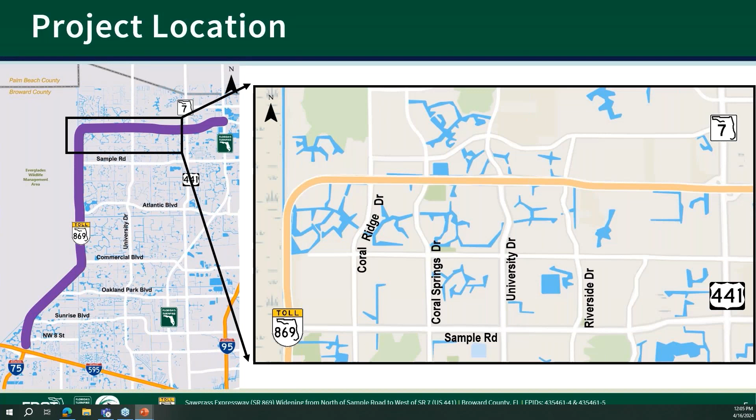The Sawgrass Expressway, shown in purple, is located in Broward County, Florida, and connects I-75 with Florida's Turnpike. The enterprise is improving mobility on Sawgrass Expressway through a series of widening projects. The projects covered in today's meeting are from north of Sample Road to University Drive and University Drive to west of State Road 7.

Florida's Turnpike Enterprise follows a 5-phase project development process for delivering needed infrastructure improvements to communities throughout the state. The phases include planning, project development and environment study, design, right-of-way acquisition, and construction. The planning and project development and environment phases of this project have been completed, and the project is currently in the design phase. The design phase is when the construction plans and proposed costs to build a project are developed.

The right-of-way phase only required acquisition of one parcel and has already been completed. The construction phase for University Drive to west of State Road 7 is anticipated to start in the first quarter of 2026, and the construction phase for north of Sample Road to University Drive is anticipated to start in the third quarter of 2026.

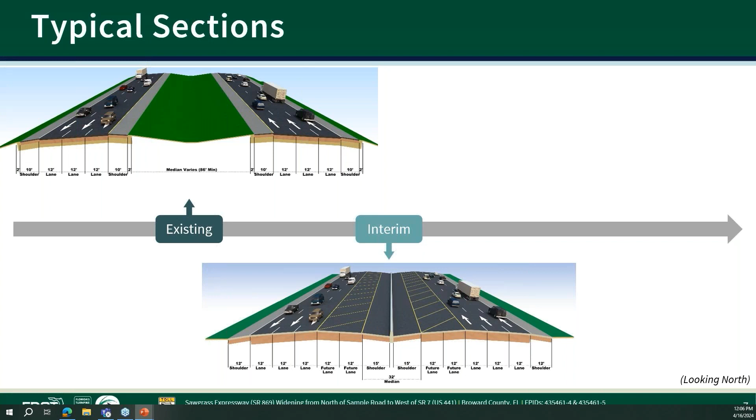Currently, the Sawgrass Expressway is 6 lanes. This project is part of a series of projects to widen Sawgrass Expressway to 10 lanes from north of Sample Road to west of State Road 7. To ensure lane continuity, only 6 lanes will be open to traffic. Once all segments are constructed, an implementation project will follow and all 10 lanes will be open to traffic. The typical section will consist of 10 12-foot lanes with 12-foot shoulders.

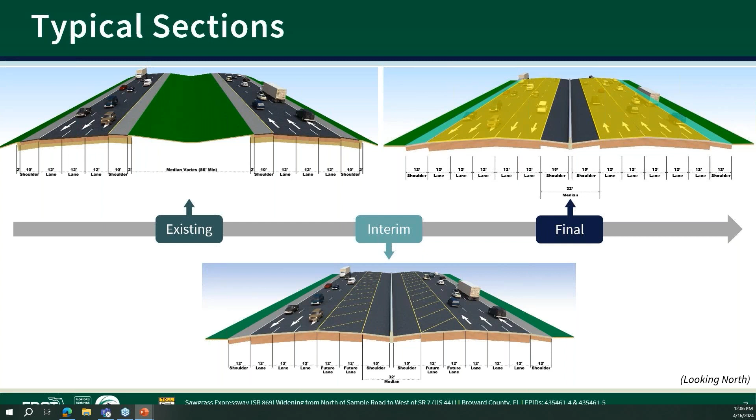We will now walk through the major design features of the project. In the following slides, the map on the left side of the screen will act as a guide as we walk through the project improvements. Please note that the map has been rotated so north is to the right.

The project begins north of Sample Road. The proposed water treatment swales are shown in light blue. Swales are shallow channels designed to store and convey stormwater runoff as well as remove pollutants. All proposed water treatment swales will be maintained within the existing right-of-way.

Additionally, existing noise walls, shown in blue, can be found on both sides of the corridor within the study. All existing noise walls will remain or be replaced, and new noise walls are also proposed. In select locations, existing noise walls will be removed and replaced in kind during construction to accommodate the widening of the Sawgrass Expressway. All existing and proposed noise walls are shown in subsequent slides.

The widening of Sawgrass Expressway continues to Coral Ridge Drive. All proposed water treatment swales will be maintained within the existing right-of-way, and all existing noise walls will remain.

In a diverging diamond interchange design, traffic crosses to the other side of the roadway between ramps. The crossover points will be signalized to enhance safety and traffic flow.

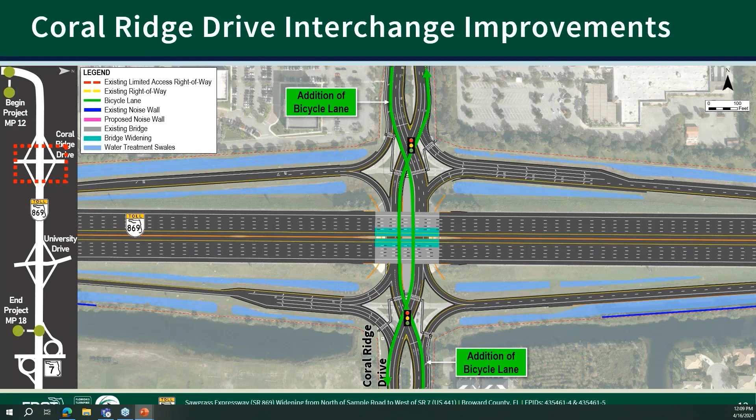Other improvements at the Coral Ridge Drive interchange include the addition of bicycle lanes, shown in green, and a sidewalk through the interchange to address gaps in pedestrian accommodations and to enhance pedestrian safety along Coral Ridge Drive.

Looking northbound, the proposed roadway typical section along Coral Ridge Drive beneath the Sawgrass Expressway accommodates 4 15-foot lanes, 2 in each direction, 2 15-foot auxiliary lanes, 1 in each direction, 8.5-foot bicycle lanes in both directions, and a 13-foot sidewalk in both directions located in the median.

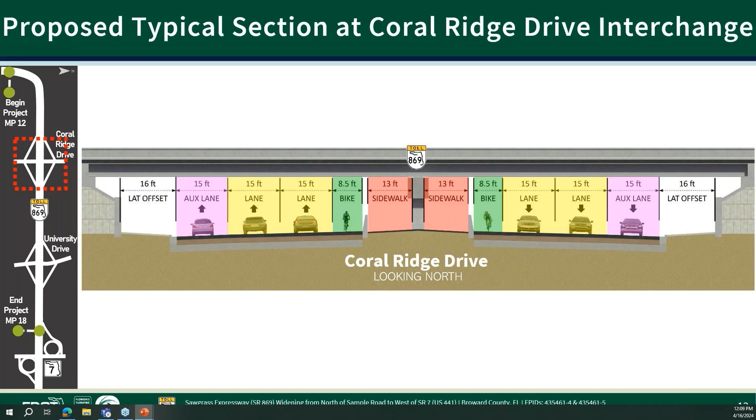As part of the improvements at the Coral Ridge Drive interchange, new turn lanes, shown in orange, will be provided. Additionally, bicycle lanes, shown in green, will be added along Coral Ridge Drive. All improvements will be accommodated within the existing right-of-way.

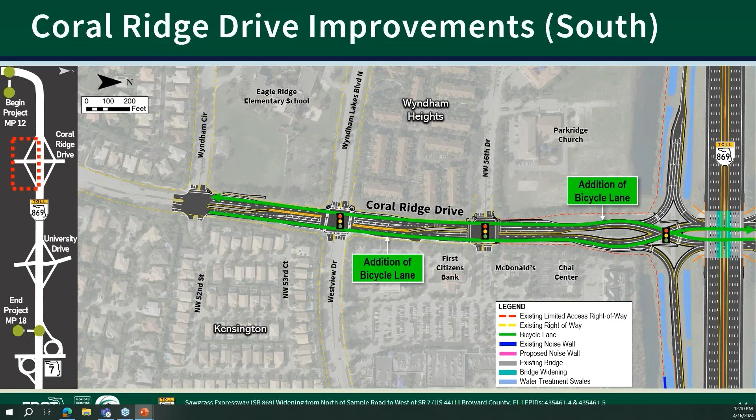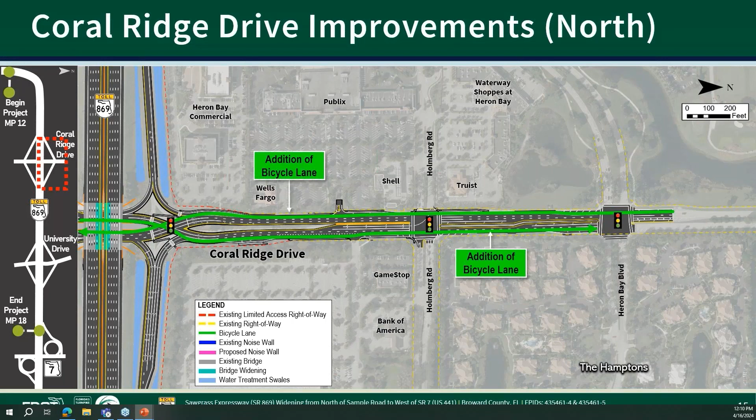North of Sawgrass Expressway, a new turn lane onto Coral Ridge Drive, shown in orange, will be provided at the interchange. Additionally, bicycle lanes, shown in green, will be added along Coral Ridge Drive. All improvements will be accommodated within the existing right-of-way.

Looking northbound, the proposed roadway typical section along Coral Ridge Drive, north and south of the Sawgrass Expressway interchange, accommodates 6 varying 11 to 15-foot lanes, 3 in each direction, one 12-foot auxiliary lane in the southbound direction, a 7-foot bicycle lane in both directions, and a 6-foot sidewalk on both sides of the road.

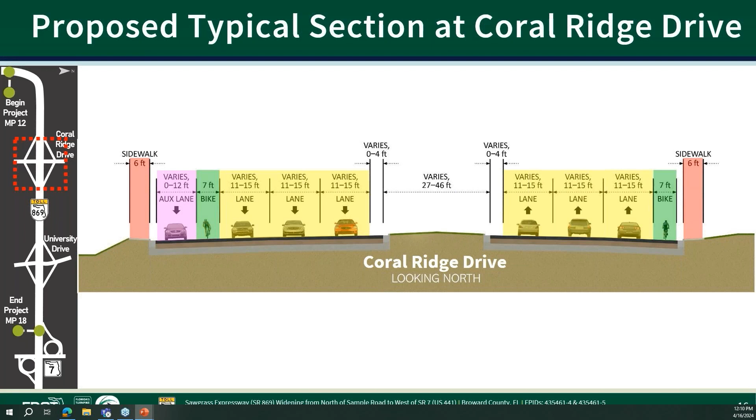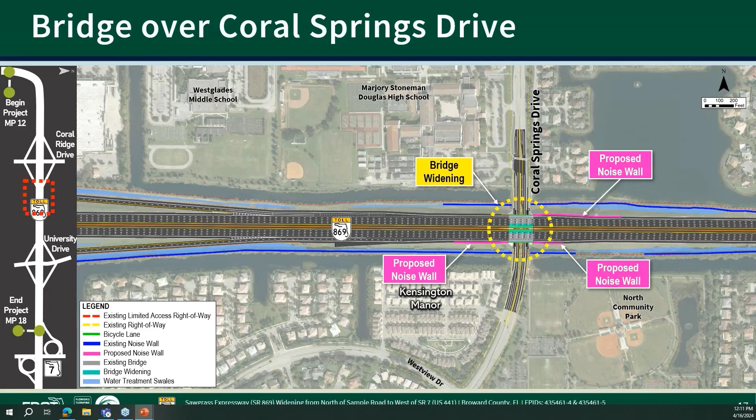For more information regarding the noise wall evaluation process, please view the Florida's Turnpike traffic noise video, available on the project website at www.sawgrasssample2sr7.com. The widening of Sawgrass Expressway continues between Coral Springs Drive and University Drive.

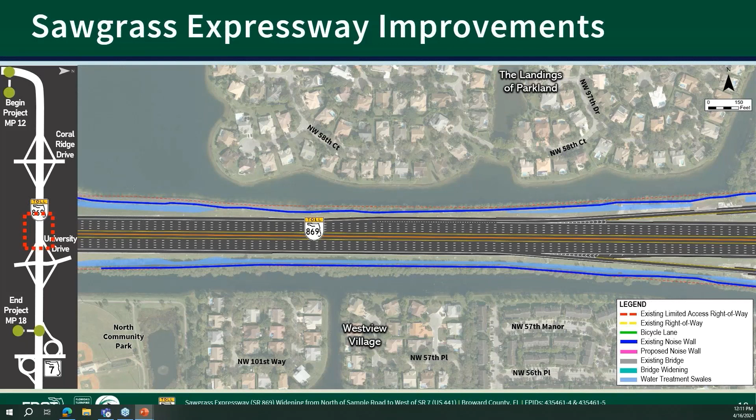All proposed water treatment swales will be maintained within the existing right-of-way, and all existing noise walls will remain. In addition to widening Sawgrass Expressway to 10 lanes, the bridges over University Drive, shown by the yellow circle, will be widened.

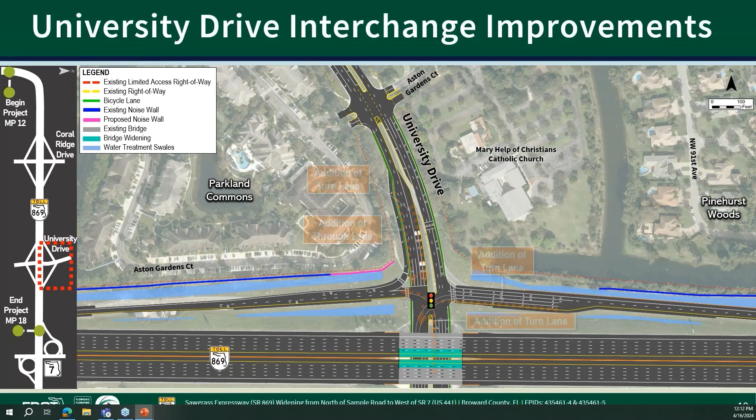A new noise wall is proposed at the Sawgrass Expressway westbound on-ramp, as shown in pink. Other improvements along University Drive and at the interchange include new turn lanes and new through lanes, shown in orange, and bicycle lanes, shown in green. All improvements will be accommodated within the existing right-of-way.

South of the University Drive interchange, new turn lanes and through lanes, shown in orange, will be provided along University Drive and at the interchange. Additionally, bicycle lanes, shown in green, will be added along University Drive.

All improvements on University Drive will be accommodated within the existing right-of-way, and this leg will tie into a widening project being conducted on University Drive, south of Westview Drive.

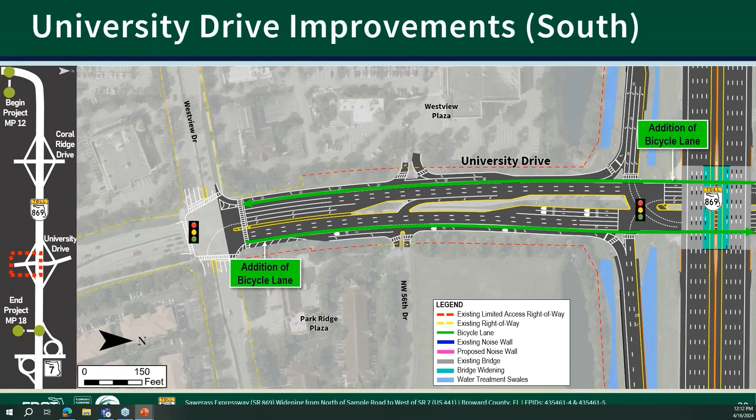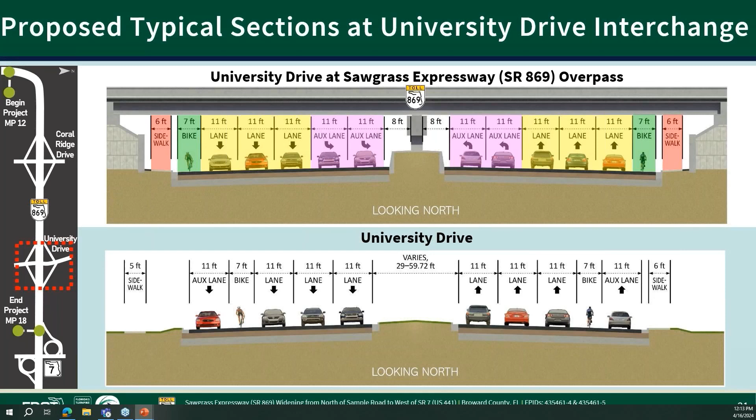The proposed roadway typical section along University Drive north and south of the Sawgrass Expressway interchange accommodates six 11-foot lanes, three in each direction, two 11-foot auxiliary lanes, one in each direction, a 7-foot bicycle lane in both directions, and a 6-foot sidewalk on the northbound side and a 5-foot sidewalk on the southbound side.

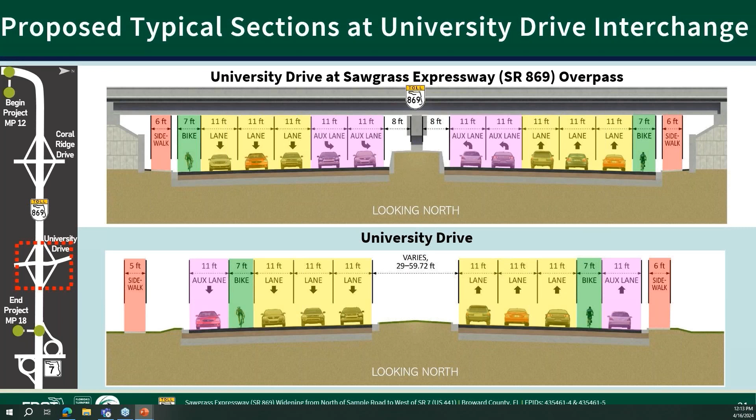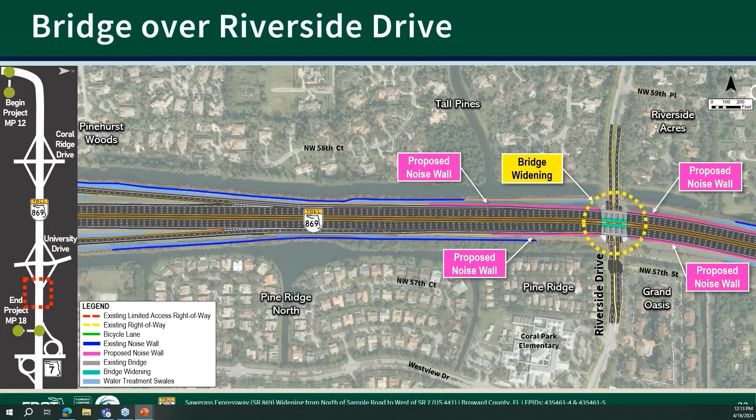The widening of Sawgrass Expressway continues. As shown on this slide, all proposed water treatment swales will be maintained within the existing right-of-way. New noise walls, shown in pink, are proposed to replace the existing noise walls.

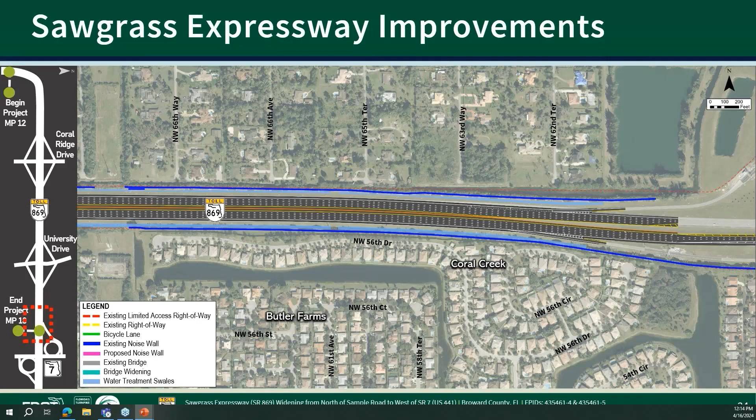The Sawgrass Expressway project ends west of the State Road 7 interchange and will tie into the existing Sawgrass Expressway. As shown in this slide, all proposed water treatment swales will be maintained within the existing right-of-way, and all existing noise walls will remain. When the project reaches the construction phase, signage will be placed to inform drivers of changes in traffic patterns.

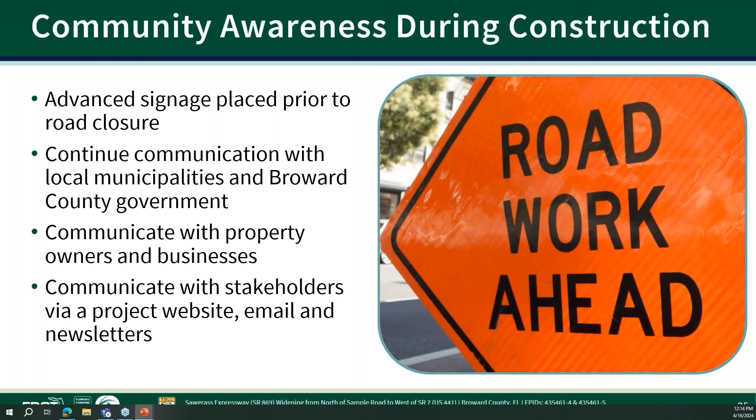The Florida's Turnpike Enterprise will continue coordinating with local agencies, businesses, and the public during project construction through the project website, email, and newsletters. Traffic will be maintained during construction to minimize disruptions to the traveling public.

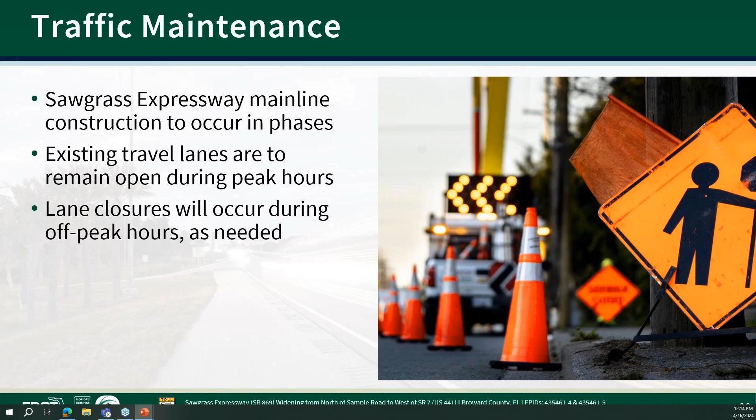Construction along the Sawgrass Expressway will occur in phases. Existing travel lanes will remain open during peak hours, and short-term lane closures will occur during off-peak travel hours as needed.

The design of the Sawgrass Expressway from University Drive to west of State Road 7 is anticipated to be completed by the third quarter of 2025, with construction starting in the first quarter of 2026. The design of the Sawgrass Expressway from north of Sample Road to University Drive is anticipated to be completed by the first quarter of 2026, with construction starting in the third quarter of 2026.

Please visit the project website for all project updates, documents, and announcements at www.sawgrasssample2sr7.com. Your questions and comments are essential to this process and will help Florida's Turnpike Enterprise understand your concerns and suggestions for the proposed improvements being presented today.

There are multiple ways to submit your comments to Florida's Turnpike Enterprise. First, you can contact the project manager, Jason Christopher, at 407-264-3260 or via email at jason.christopher@dot.state.fl.us. Or you can contact the Communications Outreach Coordinator, Carrie French, at 407-264-3908 or via email at carrie.french@dot.state.fl.us. Secondly, you may submit your questions and comments directly through the project website at www.sawgrasssample2sr7.com.

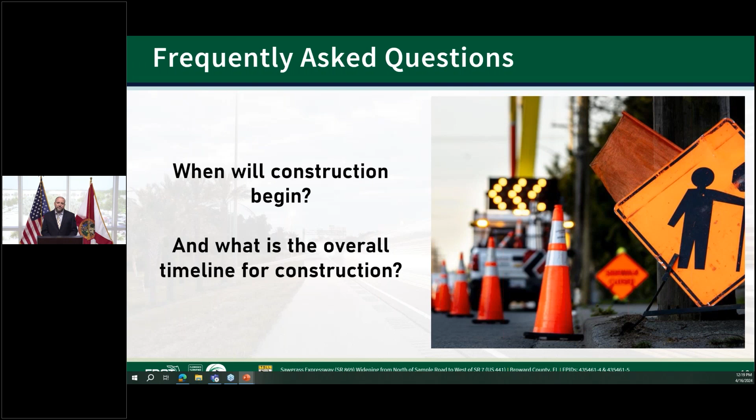Our next question asks, why is Florida's Turnpike Enterprise widening the Sawgrass Expressway?

The Sawgrass Expressway connects the cities of Coral Springs, Sunrise, Tamarac, Parkland, and Coconut Creek. The population of all 5 cities in Broward County is projected to grow between 12 to 21% over the next 16 years. The population of Broward County in 2020 was 1.9 million and is expected to increase to 2.2 million by 2040. This increase in population will result in more traffic on the Sawgrass Expressway, and therefore Florida's Turnpike Enterprise is widening it to accommodate future travel demands.

The Sawgrass Expressway is also part of the Emergency Evacuation Network, designated by the Florida Division of Emergency Management and by Broward County. Increasing the capacity of the Sawgrass Expressway will reduce evacuation times for residents of Broward County during emergencies and hurricane evacuations.

Our next question is, what are the benefits of a diverging diamond interchange, also known as a DDI? This project will convert the existing diamond interchange at Coral Ridge Drive to a diverging diamond interchange.

A diverging diamond interchange provides significant safety and traffic benefits compared to a traditional interchange, such as improving safety by utilizing a curved roadway design, which results in slower design speeds, improving safety by reducing the number of times vehicles have to cross one another, increasing the capacity for left-turning traffic movements, reducing the potential for wrong-way traffic movements onto ramps, and improving sight distance for traffic making turning movements within the interchange.

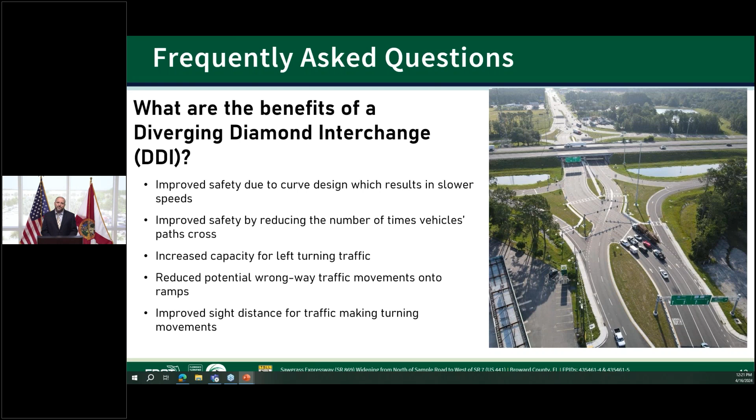We have another two-part question. The first part is, will this project impact existing noise walls? And the second part is, will new noise walls be provided?

A noise study evaluation consistent with federal and state regulations was performed for this project. All the existing noise walls will remain or be replaced, and new noise walls are also proposed. In select locations, existing noise walls will be removed and replaced in kind during construction to accommodate the widening of the Sawgrass Expressway. For more information regarding the noise wall evaluation process, please visit the project website to access the link to the Florida Turnpike traffic noise video.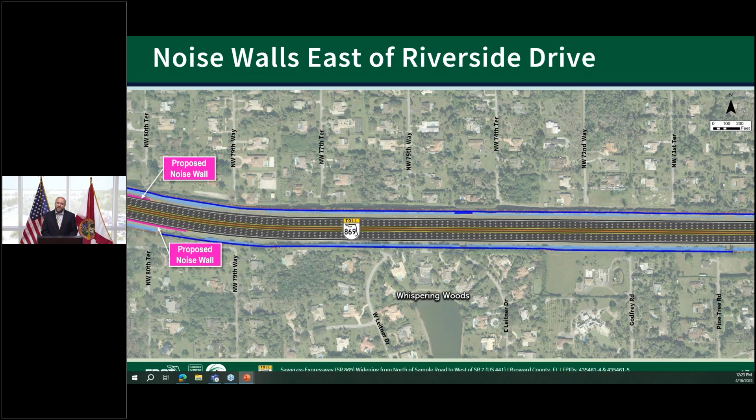The next question is regarding the continuity of the Sawgrass Expressway. Since this project ends west of State Road 7, what will happen to the Sawgrass Expressway from State Road 7 to Florida's Turnpike? There is currently an ongoing project development and environment study for the Sawgrass Expressway from west of State Road 7 to Power Line Road that evaluated the capacity and safety improvements to the corridor.

For more information regarding the Sawgrass Expressway PD&E study from west of State Road 7 to Power Line Road, please visit that project website at www.sawgrass441topowerline.com.

The next question is, are drainage improvements part of this project? Yes, this Sawgrass Expressway widening project includes drainage improvements. The proposed drainage improvements are designed in accordance with all South Florida Water Management District and Florida Department of Transportation's water quantity and quality criteria.

The proposed drainage improvements include modifying existing drainage systems to provide additional storage to accommodate the added pavement from these projects. A South Florida Water Management District environmental resource permit will be obtained prior to beginning construction.

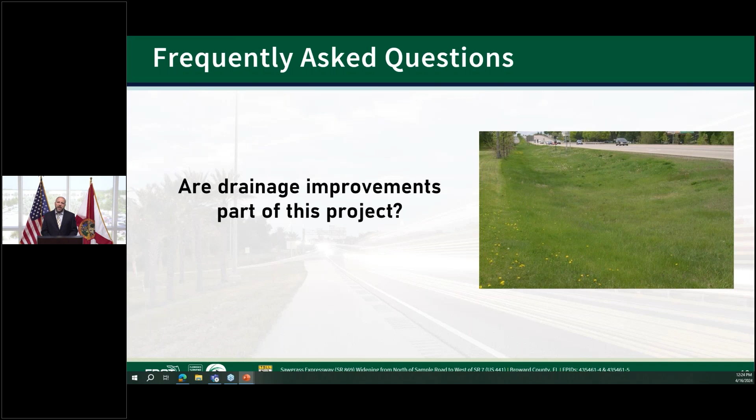This question is asking if right-of-way will be acquired as part of this project. The right-of-way phase of this project has already been completed and required the acquisition of just one parcel. This last question concludes our frequently asked questions session.